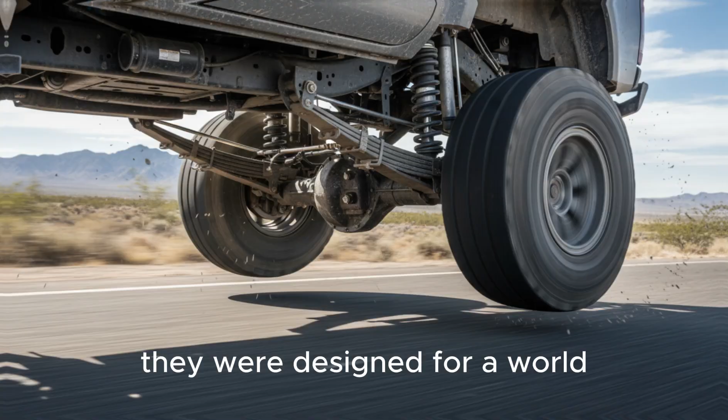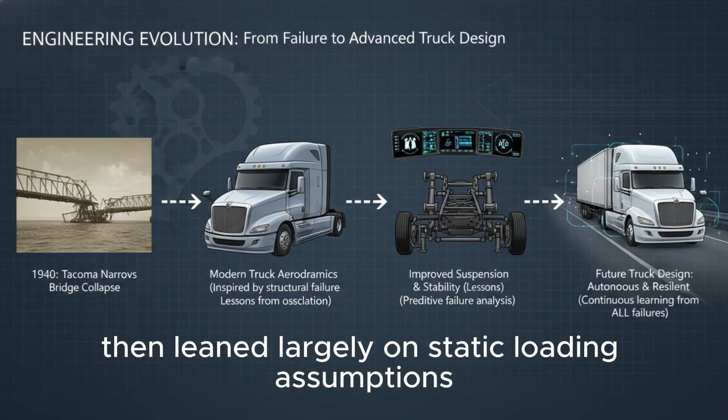In the early decades of the 20th century, steel and concrete bridges were not the material marvels we know today. They were designed for a world where the heaviest trucks weighed only a few tons, not modern highway beasts pushing 40 tons and beyond. Bridge design then leaned largely on static loading assumptions: horse-drawn wagons, early automobiles, pedestrians, loads that engineers could describe, predict, and budget for. Industrial trucking shattered that mathematical language.

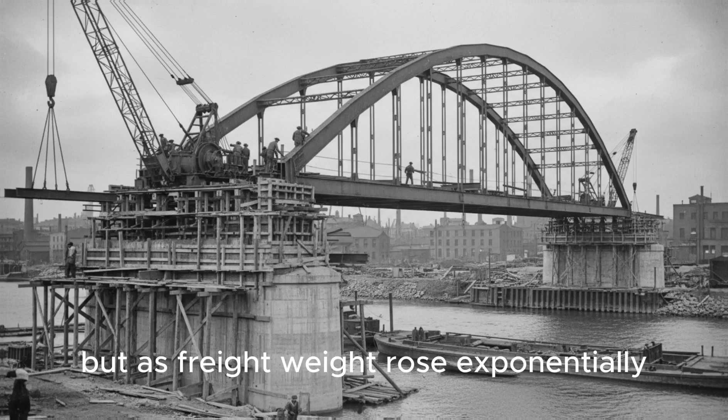Steel spans carry loads by distributing forces through main girders, cross beams, and X-bracing members. But as freight weight rose exponentially, the forces transmitted at the wheel-deck interface did not merely rise in a smooth, linear way. They arrived as concentrated pulses. Early rubber tires, without today's refined suspension systems, generated vertical impacts, dynamic loads that accelerated material fatigue far faster than

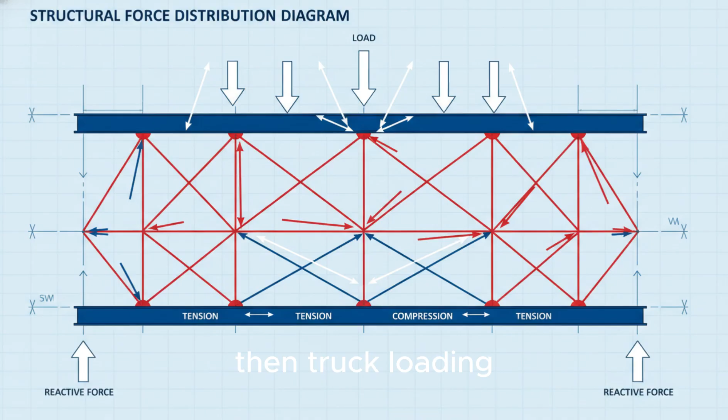static weight ever could. The famous Tacoma Narrows Bridge collapse in 1940, though primarily driven by wind-induced resonance, still forced engineers to confront an uncomfortable truth: infrastructure could no longer be built on industrial intuition. If wind could destroy a bridge, then truck loading hundreds of times heavier in direct mechanical effect could not be

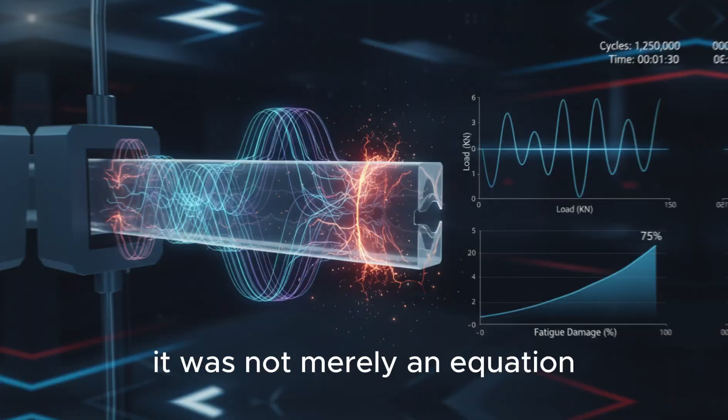treated casually. After numerous smaller bridge failures repeated across the United States and Europe, lawmakers faced a blunt conclusion: upgrading every bridge to match the modern trucking era was financially impossible. So the solution had to come from the trucks. This is where the bridge formula was born. It was not merely an equation. It became a rule that reshaped almost every heavy truck design for the century that followed.

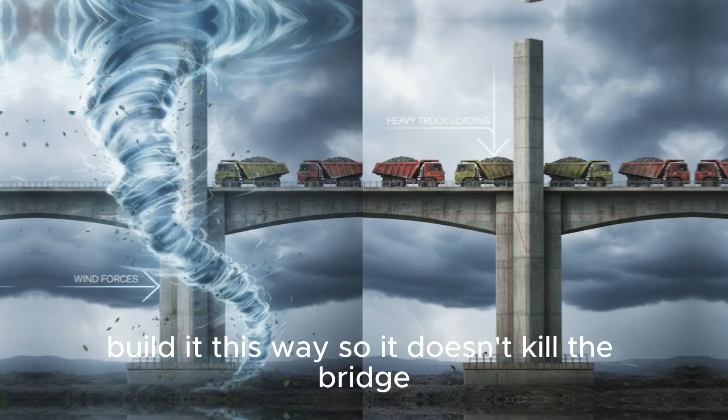The formula links axle spacing, axle count, and total weight distribution to ensure that the load applied to bridges stays within design limits. From that point on, every centimeter of frame length, every axle placement, had to obey a strict structural logic. It was no longer "build the truck as long as you want." It became "build it this way so it doesn't kill the bridge." If physics is the foundation of infrastructure, the bridge formula was the first legal framework that taught trucks how to exist inside a world of fragile spans.

As regulators began to realize that each axle produces a different level of stress on the road surface, a new way of thinking emerged: if infrastructure wears out because of the frequency and intensity of loading, why not tax based on those very factors? Instead of taxing by total weight alone, some systems began taxing by the number of axles on the ground. This was a shift from weight tax to something closer to surface damage tax, an approach more aligned with real-world

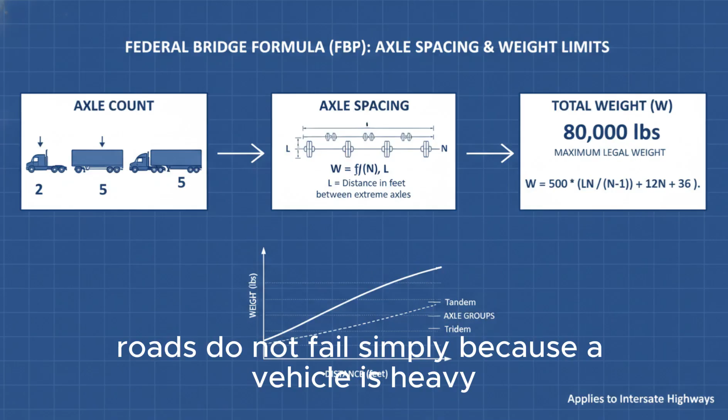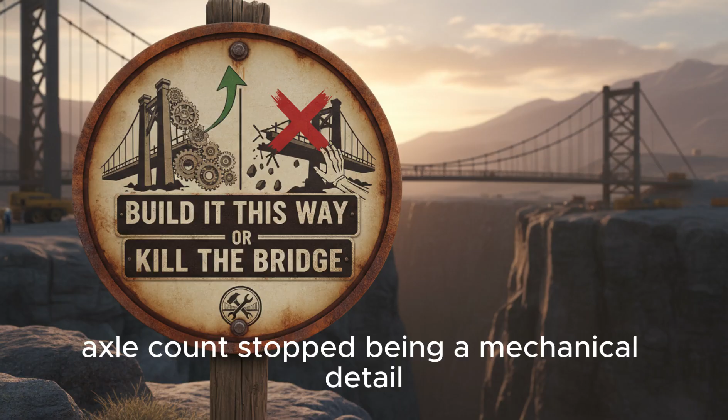mechanics. Roads do not fail simply because a vehicle is heavy. They fail because of how weight is distributed per axle and how many cycles of loading repeat over time. A 20-ton truck on 2 axles damages pavement more aggressively than a 20-ton truck spread across 5 axles. In this new logic, axle count stopped being a mechanical detail. It became a financial variable.

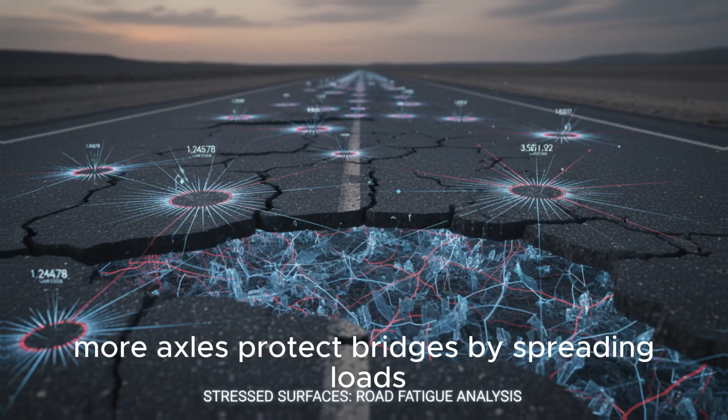Freight companies realized that every extra axle did not only add drag and complexity, it could also increase tolls, taxes, and long-term operating costs. And that created a paradox. More axles protect bridges by spreading loads. But more axles also raise operating expenses. What followed was an invisible negotiation between regulators and industry.

Governments wanted to preserve infrastructure. Companies wanted to preserve profit. The lift axle became the bridge between those opposing goals, because it can rise when unnecessary and drop when heavy loads demand it. A truck can effectively change its configuration depending on context.

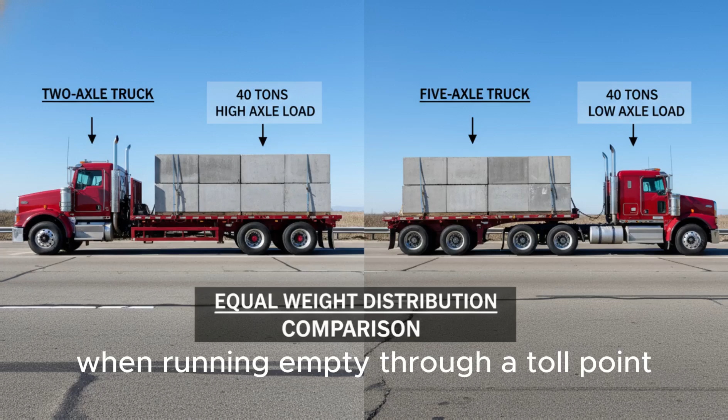When running empty through a toll point, the lift axle is raised, turning the vehicle functionally from a 4-axle setup into a 3-axle one, reducing fees. When hauling heavy freight, the axle drops, satisfying bridge loading rules and spreading pressure.

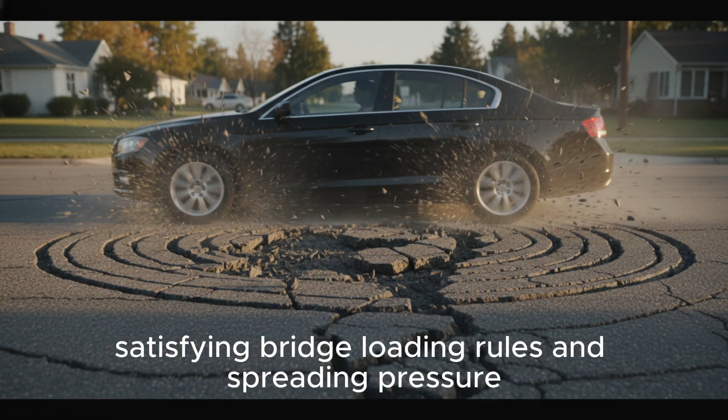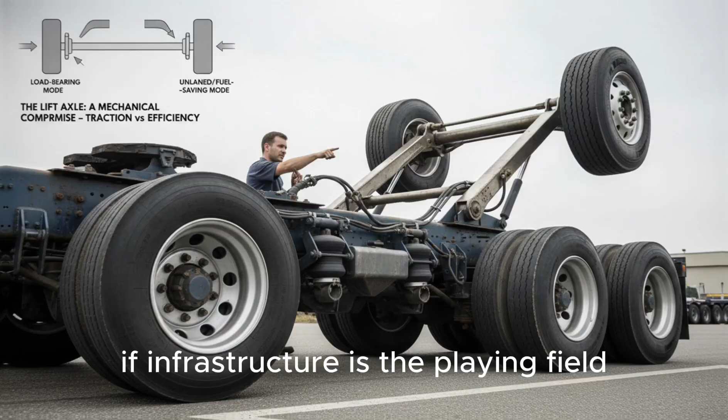This is where mechanical engineering crosses into political economy. The truck stops being a purely physical machine and becomes an entity operating inside a legal system. Each wheel becomes a tax point. Each lift axle activation becomes a strategic cost optimization. If infrastructure is the playing field, axle taxation is part of the rulebook, and the lift axle is how companies learn to play that rulebook intelligently.

As freight competition intensified in the late 20th century, every small factor inside a truck's journey became a variable in the profit equation. Fuel, tires, road wear, delivery time, tolls, each minor cost compounded into the difference between profit and loss. A truck was no longer just a carrier. It became a living mathematical model.

In that environment, the lift axle evolved into a mobile economic module. With one action, the truck can redistribute weight, change its wheelbase, reduce rolling losses, and alter its axle-based fee profile. A 3-axle truck can become 4 axles when needed, then return to 3 when it's efficient. This isn't just mechanical transformation, it's strategic flexibility.

Large logistics firms began modeling profitability around lift axle usage frequency. One axle does not only protect a bridge, it protects the balance sheet. A well-optimized fleet can save millions annually by reducing rolling resistance on empty runs and lowering axle-based fees at toll stations. Internal industry studies have highlighted another revealing detail.

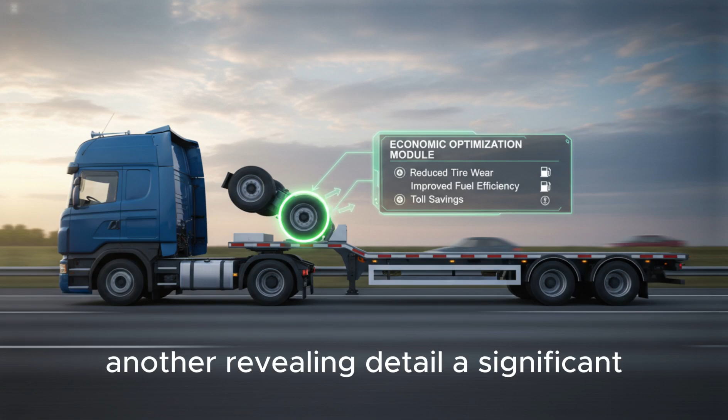A significant portion of truck travel time is spent running empty. That means for hours at a time, part of the vehicle's structure is doing work that produces no value, yet still generates cost. Engineering needed to answer one question. How do you stop that extra body from charging you rent? The lift axle became a brilliant solution.

As a result, the shape of modern trucks is no longer designed solely for maximum hauling capacity. It is designed around a dynamic balance between infrastructure durability, operating cost, and configuration flexibility. Every axle, every air suspension bag, every stretch of frame reflects thousands of hours of simulation-driven optimization. In this era, the lift axle moved from the workshop into the boardroom. It stopped being an accessory and became one of the key levers shaping profitability across global logistics.

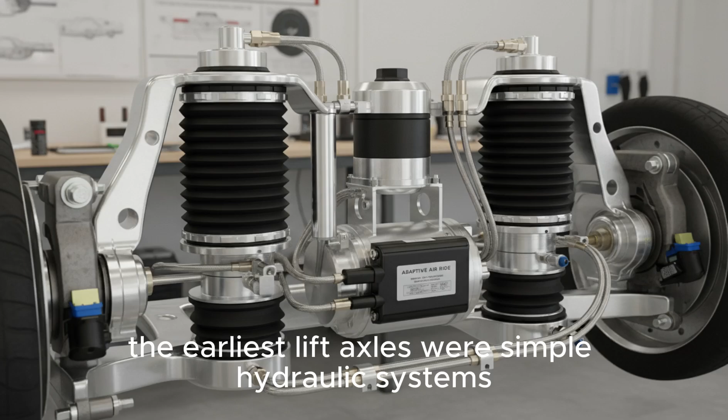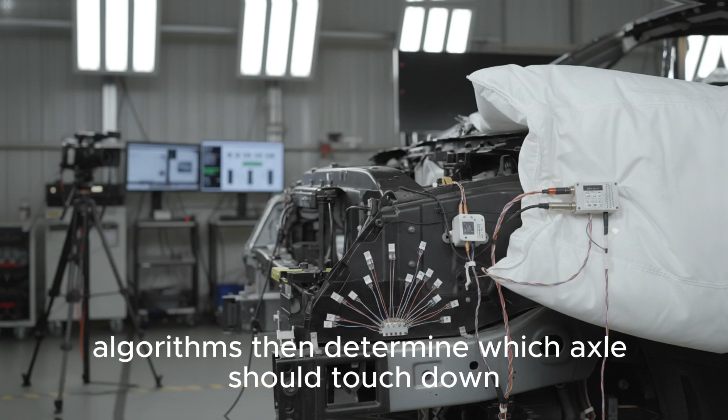The earliest lift axles were simple hydraulic systems, heavy, less reliable, and dependent on manual driver control. But modern sensors and electronic control have transformed them into components that can, in effect, decide based on real-time data. Load sensing systems function like mechanical senses. They measure frame deformation, airbag pressure, suspension sag, and from that infer real payload. Algorithms then determine which axle should touch down, which should lift, and what air pressure distribution yields optimal load sharing.

Trucks began adjusting themselves automatically to road conditions, payload changes, and even environmental factors. It resembles biological reflex systems. A cat landing from a jump instinctively adjusts legs and spine to distribute impact forces. A modern truck adjusts axles and air pressure to reduce stress on bridges or minimize rolling losses when empty. Engineering, through embedded electronics, has recreated a form of adaptive behavior.

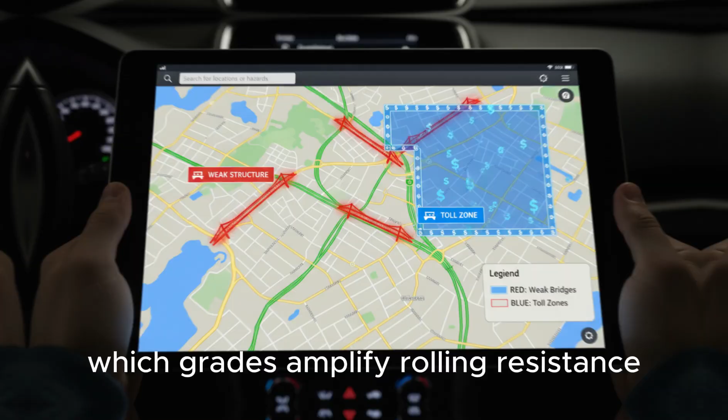Smart control technology also opens the door to machine learning in logistics. Future trucks could learn from data which routes contain weak bridges, where axle-based toll rules are harsher, which grades amplify rolling resistance. Then they could activate lift axles automatically, optimizing energy and cost without the driver touching a switch.

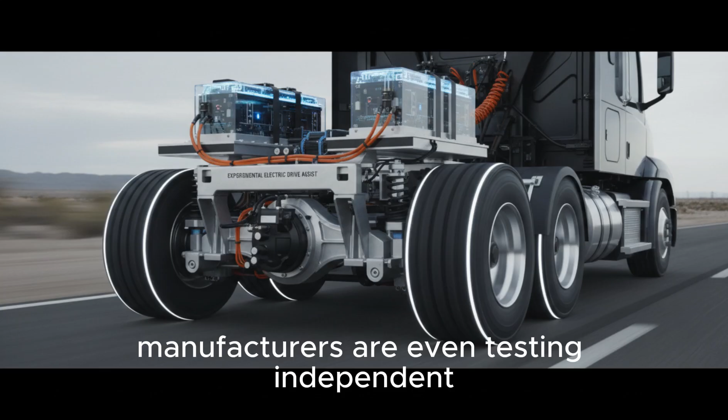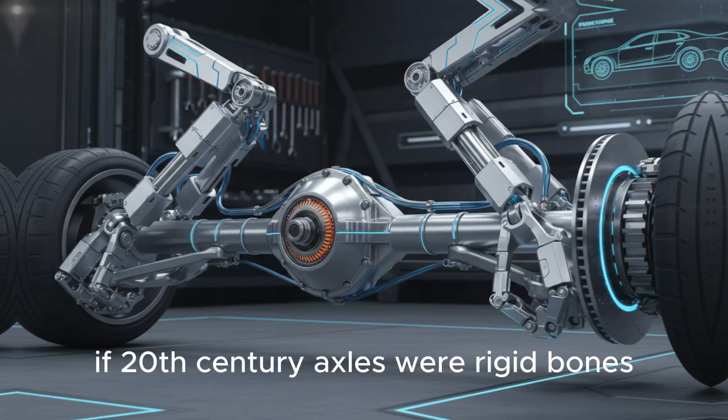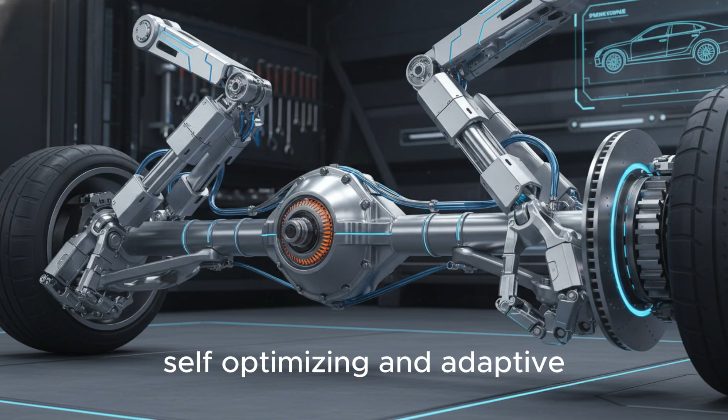Manufacturers are even testing independent electric axle systems, where a lift axle doesn't only lift, but can provide drive assistance when needed, or recover energy through regenerative braking. At that point, the lift axle stops being merely a cost reduction organ. It becomes part of the vehicle's energy architecture. If 20th century axles were rigid bones, 21st century axles are intelligent robotic limbs, self-adjusting, self-optimizing, and adaptive. This evolution is not meant to challenge physics, but to cooperate with it more intelligently.

So when you notice a floating wheel on a highway, it's easy to assume it's just a minor mechanical detail. In reality, it is the symbol of a much larger system, one where physics, law, and economics are forced to intersect to keep infrastructure stable. The lift axle is proof that technology does not evolve in a vacuum. It responds to pressure from its era.

When bridges weaken, technology adapts. When tax rules shift, design shifts. When freight demand rises, optimization becomes a survival instinct. Bridges no longer stand alone under the burden. Engineering has compensated with intelligence by creating wheels that know when to disappear. In the hidden war between heavy loads and infrastructure, victory does not belong to the stronger side, but to the side that adapts best.